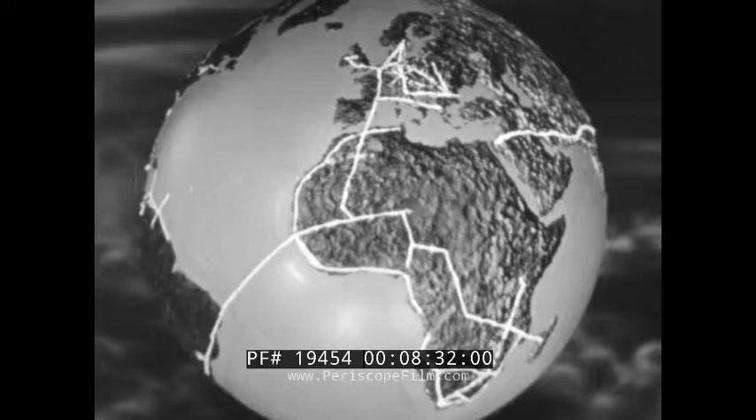Worldwide coverage, but it has not been accomplished in a day. It is the result of a smooth-running combination of men and machines. In that combination lies the story of Lockheed itself. It is a success story, modern, exciting, typically American. The Lockheed Aircraft Corporation plant, Burbank, California, in 1926. And today, the same company, the same location, but quite definitely not the same plant.

As recently as 1932, sales aggregated the overwhelming total of $23,298.03. In 1940, actual deliveries amounted to more than $42 million, and conservative estimates indicate that in 1941, this figure will be more than doubled. And to the men of Lockheed belongs a large share of the credit, to their skill and to their loyalty. They are a cross-section of typical American workmen: drillers, riveters, tool makers, die casters, machinists, and technicians.

In 1931, there were only 300 of them. 1941, over 35,000. Every man who checks in, from office boy on up, has taken and passed exhaustive tests covering intelligence, temperament, and special aptitude to prove his individual ability. 35,000 American workmen, the right men for the right jobs to build the best planes.

This is not a trick shot made with mirrors. It is the drafting room of the engineering department, where every new Lockheed has its beginning. A beginning conceived with the purpose of supplying the answer to definite needs of the aviation industry. To attain this goal, over 850 engineers make over 5,000 drawing plans, devoting a total of over 200,000 work hours to their mission of creating one new design.

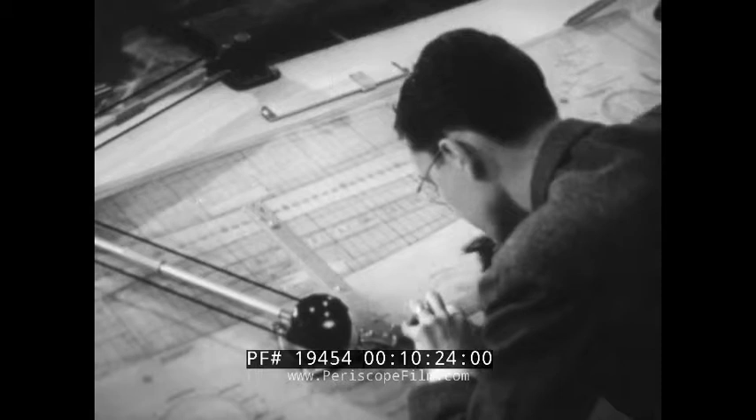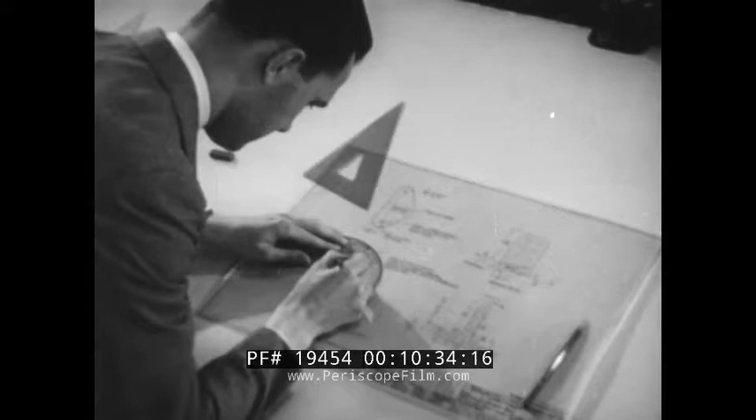The component parts of a modern airplane's wing, fuselage, and tail surface are almost countless in number, yet every single one of them must be engineered. Even the most minute part receives the greatest attention. 4 separate drawings are made showing detail from 4 different angles. Although the part is no larger than a silver dollar, it will have to go a great deal further.

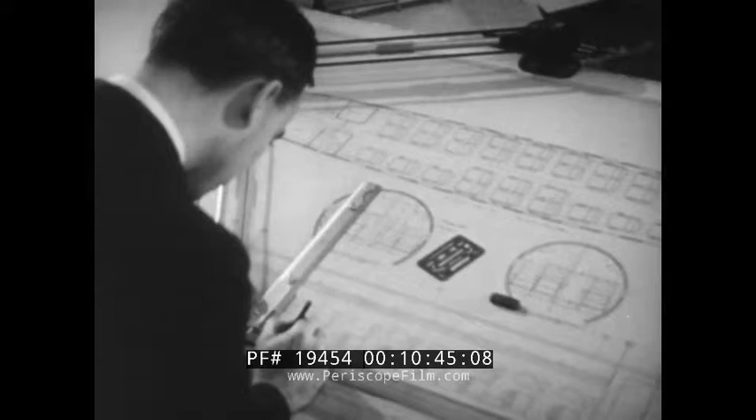The interior of a plane is one feature of design seldom associated in one's mind as coming under the supervision of the engineer. Yet one of his most important jobs is to provide utter comfort for passengers traveling through the air at high speeds. The Lodestar's cabin has been designed for this comfort. Inside, the sound of powerful motors is reduced to a pleasant hum by scientific soundproofing and vibration control.

Restful chairs, ample space, and headroom are results of thoughtful planning, and all Lockheeds are especially adaptable to the requirements of private owners. For businessmen to whom time means money, the Lodestar is convertible into a convenient and dependable office in the sky. The compact 12 becomes a comfortable lounge for attending important events anywhere at any time.

The cabin of Lockheed's new four-motor transport, the Excalibur, will look very much like this. Although the plane is still under construction, the engineers have built an exact replica, known as a mock-up, out of wood. In this way, every possible detail of passenger comfort can be effectively predetermined and applied.

But the ideas and plans that this man and the hundreds like him put into execution are not only those of Lockheed's chief engineers, but those of the entire flying world. For the Market Research Division maintains close contact with the operative branch of the industry. The staff compiles lists of important features relating to a plane's design. These findings are set up in the form of questionnaires. If you were to build your own ship, on the flight station, where would you locate emergency controls? On the engine control stand, where would you put the levers and the rudder pedals?

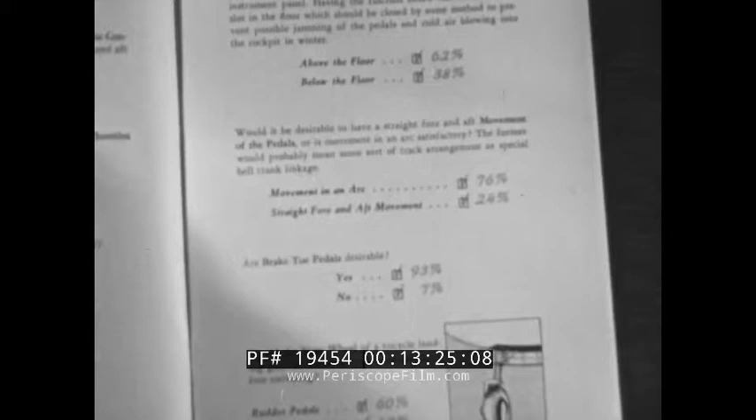Detailed graphs and charts are compiled by competent statisticians. No suggestion is too small. Every answer to every question is checked and noted. These findings are recorded in another pamphlet. You told us this is the way you would do it. On flight station, on engine control stand. And on rudder pedals, we asked, are brake toe pedals desirable? 93% said yes, 7% no. That verdict is submitted by men whose combined opinions represent the experience of over 16 million hours of flying.

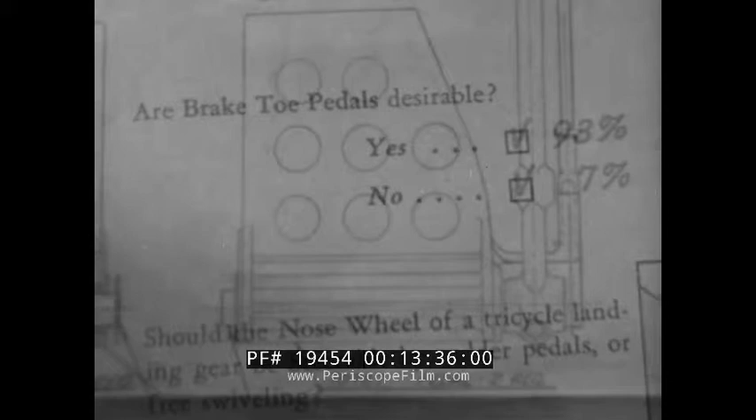These practical viewpoints, as gathered by market research, are submitted to the engineers. They combine these ideas together with their own creative ability in the conception and building of every new Lockheed plane. That's how Lockheed designs airplanes to suit the men who know airplanes best: operators, pilots, and regular airline passengers.

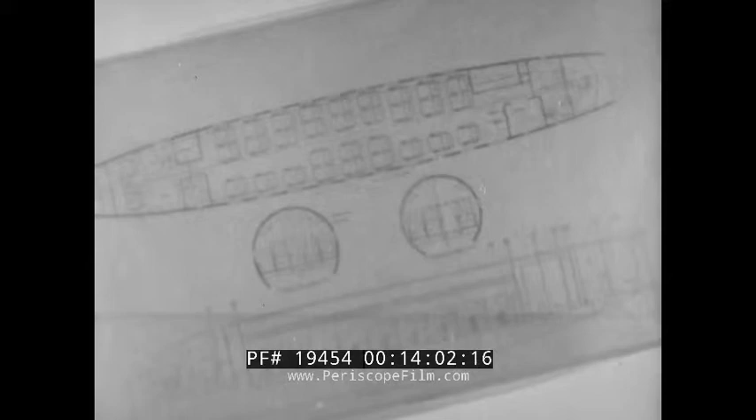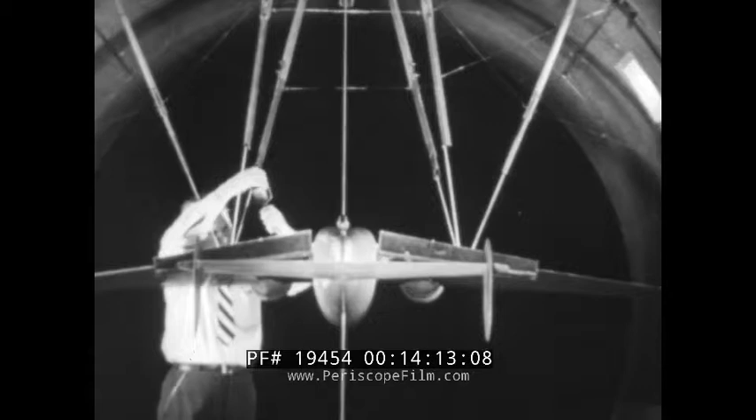And the first form a new plane takes is on paper. From these drawings and thousands like them, an exact scale model known as a wind tunnel model is made and is connected to instruments which determine its flight characteristics. The model is hand-carved, accurate to the fraction of an inch, weighs over 500 pounds, and costs more than $5,000 to build.

The door is closed, the wind tunnel sealed. A flip of the switch and the wind propeller whips up to speed. The model is exposed to a far higher velocity than this 90-mile-an-hour wind. The small wind tunnel model is actually subjected to and withstands a much greater force.

From an idea to an actuality, from theory to fact, from a model to a completed Lockheed, the plane has been built. More than that, into it has been built the strength, ruggedness, and durability necessary for its safety and high-speed performance. But not so long ago, this shining plane was only a small part of a trainload of metal addressed to Lockheed.

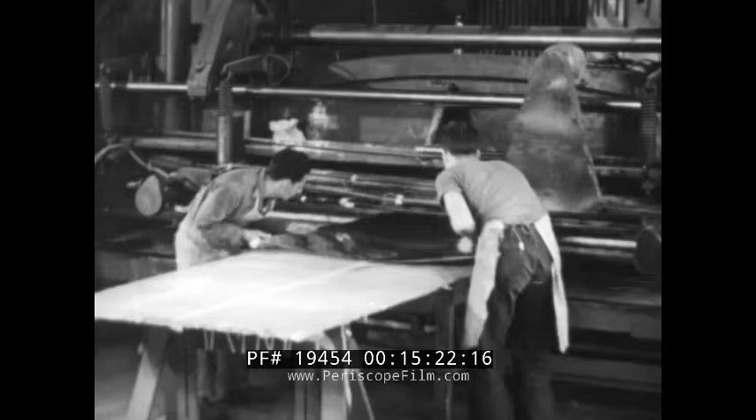For the metal inside these wooden frames is the stuff that planes are made of. Hard and strong, it must be fabricated by men and machines into the parts that make airliners. Giant shears act as huge mechanical scissors. Metal sheets are slipped into place. The sharp blade strikes and cuts through them as if they were cloth.

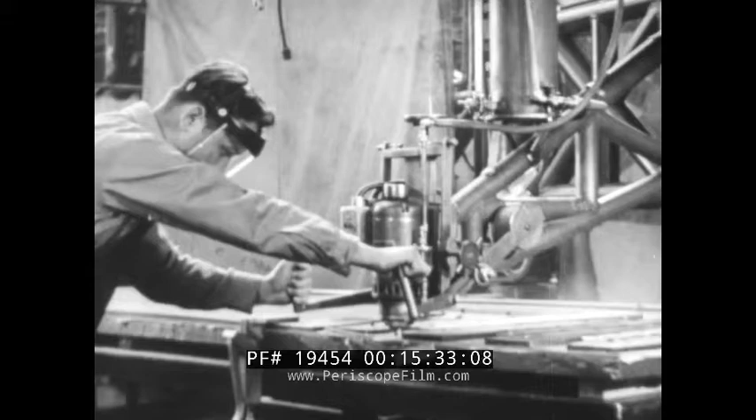The high-frequency router, a dental patient's nightmare, turns 15,000 revolutions a minute and cuts layers of metal into their first rough shape. The bit turns so fast that it must be cooled by a constant stream of oil.

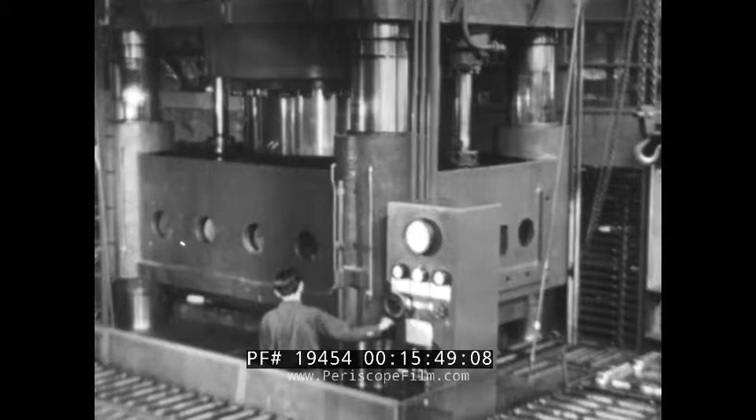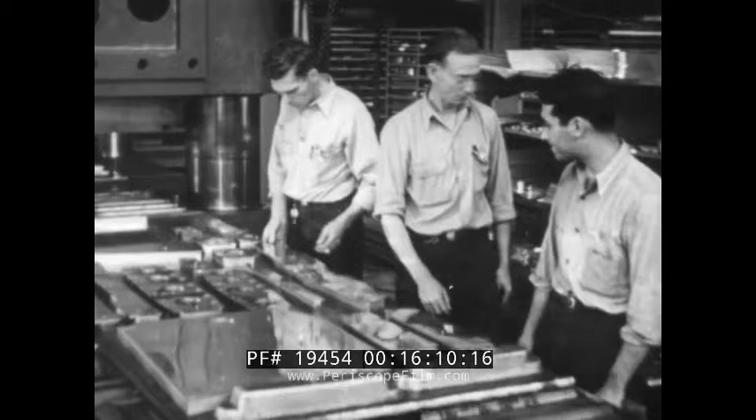The massive hydro press exerts an overall pressure of 9 million pounds, and it literally squeezes parts out of metal. An endless chain of roller conveyors carries a tray with the forms to workmen. They put the metal which has already been cut to the correct size in place on the forms. The tray now continues on its way into position under the press. The operator touches a switch, the press starts down, and look out below.

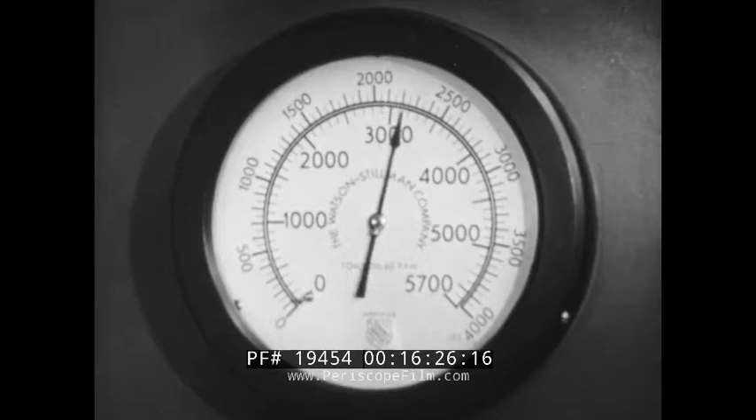Almost unbelievable pressure, an irresistible force, but under perfect control. And where plain sheet metal went in, finished parts come out. The hydro press turns out more parts in 1 minute than 2 men could complete in a whole day, and turns them out better and more accurately.

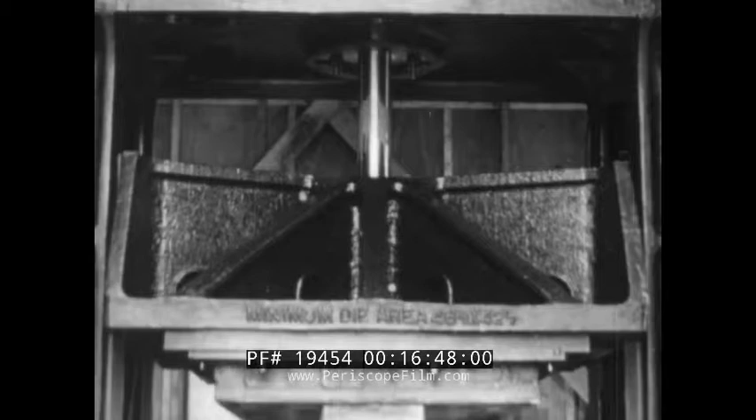A compressed air stamp which forges metal is an excellent example of powerful machinery under absolute control. Taps as gentle as a tack hammer, then the crushing impact. What a nutcracker this outfit would make. And yet its control is so delicate that it can crack an egg, at least so the operator claims.

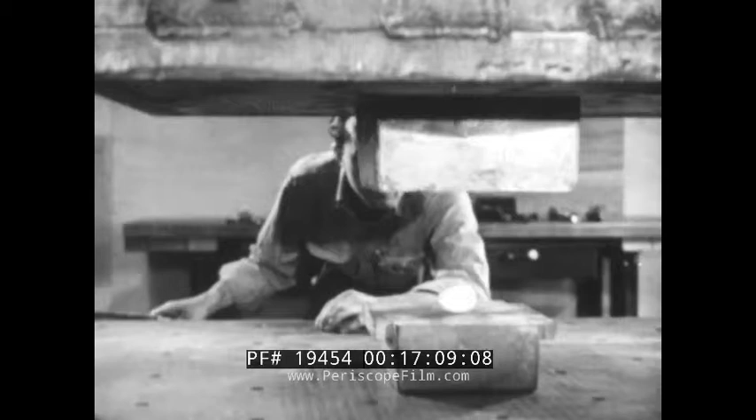Skilled men and precision machines have fabricated these parts, but even metal can be strengthened and protected. To do this, there are several types of processing. Complete electrochemical anodizing baths provide parts with a protective coating of oxide film. This is a safeguard against the threat of corrosion caused by moisture. It is an interesting fact that these parts are protected against any harmful effects of moisture by being given a bath.

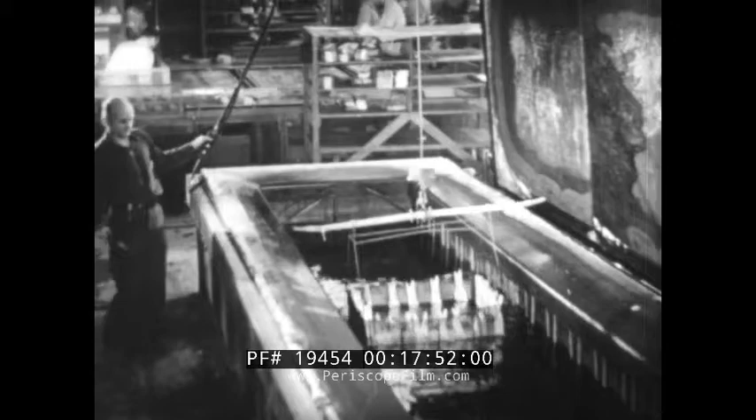Another type of bath is used for a different purpose. In order to harden and thereby strengthen certain parts, they are immersed in a hot salt solution of sodium potassium nitrate. In large ovens, other parts are hardened by baking at 1550 degrees Fahrenheit and quenching them in oil.

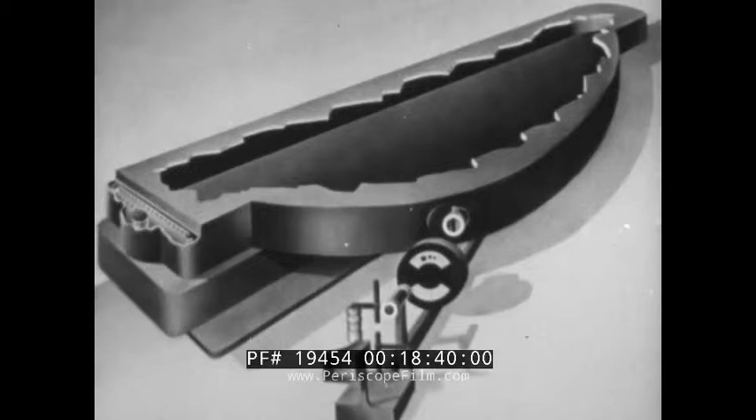It is easy enough to say that these parts, which will eventually be the plane, are strong. To prove that they are, to constantly guard the Lockheed measure of strength is the duty of the testing laboratory. A spectrograph is one of the most modern scientific testing devices. It analyzes the purity of the metal alloys which go into a plane. Tremendous heat created by an arc burns sample filings of the metal. These filings are placed in a cavity on the lower of 2 acid-treated graphite electrodes and then burned.

The light of the burning metal passes through a lens and then through a rotating sector, the adjustable opening of which controls the amount of light falling on the slit. The light now passes through the slit and falls upon a diffraction grating. This diffraction grating is a concave aluminized glass plate on which 24,000 lines per inch have been ruled with a diamond point. The light is separated by the grating into wavelengths.

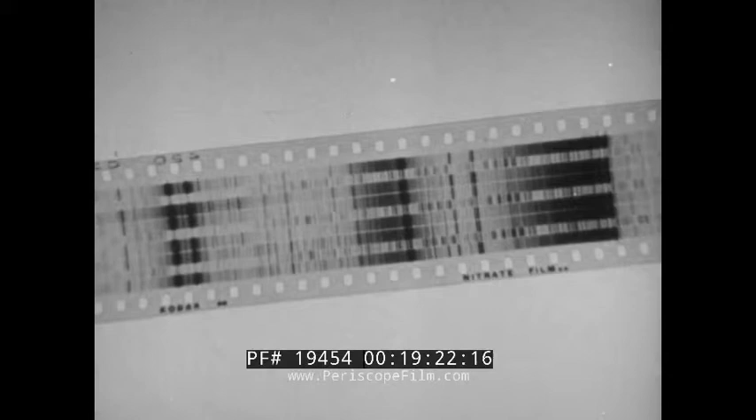These wavelengths, or light rays, fall upon a strip of film, and a photographic record of them is thus produced. Since each element has its own wavelength, from the developed film it is possible to determine exactly which are present in the alloy. In this manner, the spectrograph immediately detects all impurities, and any inferior metal is promptly discarded.

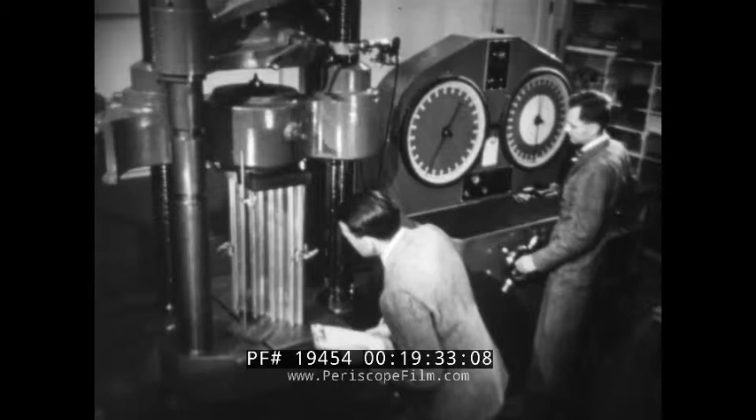The sole purpose of this huge machine is to break things. Its powerful jaws, capable of a compression of 300,000 pounds, are about to crush a small section of the wing in order to measure its resistance. Now watch carefully. The upper jaw is clamping down with an invisible, relentless force on the seemingly frail strip of metal. But actually, just how frail is it?

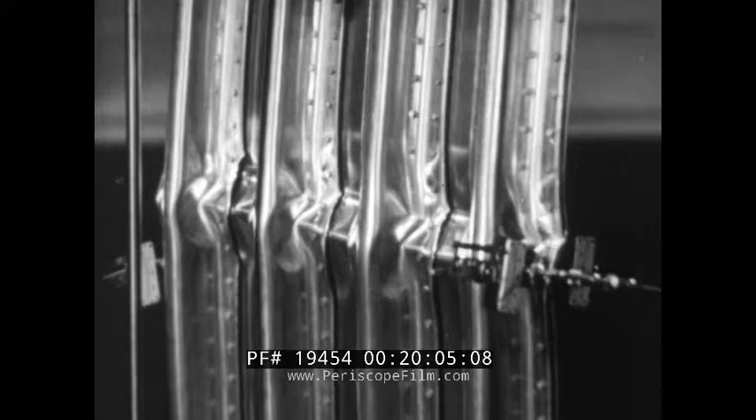60,000 pounds? 70,000? There it is, a slight ripple. The breaking point has been reached, and it takes a pressure of over 80,000 pounds to even bend this frail little section of a wing. For contrast, let's see what happens to a solid cylinder of concrete, which certainly appears much stronger. There is the first crack, and the concrete shatters completely under a pressure of less than 75,000 pounds.

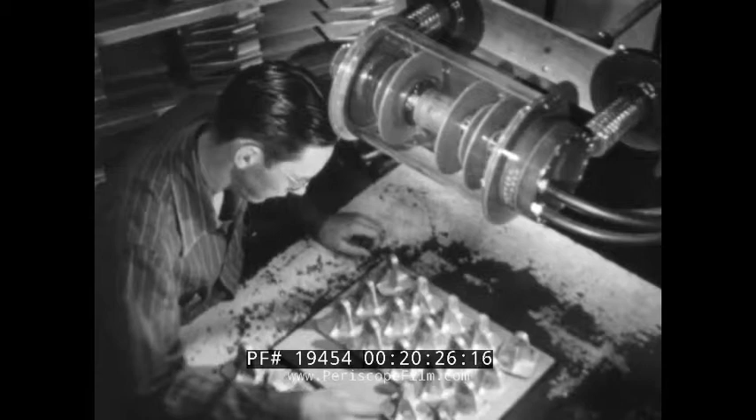All stressed parts, such as forgings and castings, are X-rayed for any possible flaws in the metal. Lockheed X-rays more parts than all other aircraft manufacturers combined. They may look new and shiny on the surface, but that doesn't matter. What are they like underneath? This batch is fine, perfect.

A different story here. Those slight, almost imperceptible flaws which doom it to the scrap heap would be invisible to any eye other than the X-ray. Therefore, although it is important to know what is on the outside of a plane, every stressed part is X-rayed because Lockheed thinks it is even more important to be absolutely positive of what is on the inside. Yes, every part of this plane is built for the strength, ruggedness, and durability to achieve the highest speeds.

And there goes the Lodestar. Carrying a full load of 17,500 pounds, it speeds down the runway for the takeoff. In 15 seconds, after a run of only 860 feet, it leaves the ground and soars into the air, climbing at a rate of 1,200 feet per minute.

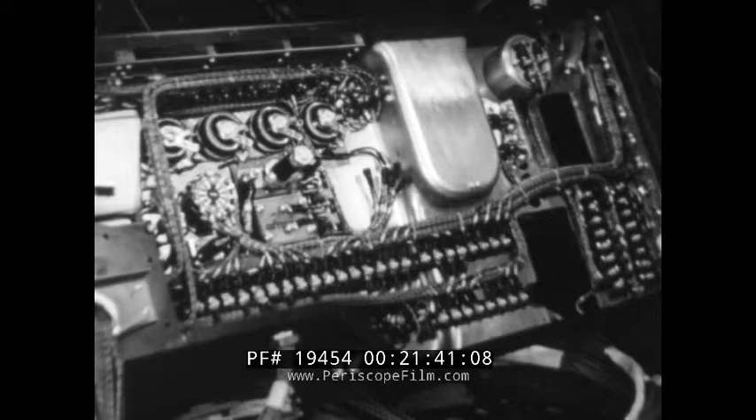And while the plane is in flight, the dials and indicators on the panel are the guides by which a pilot flies. Over a half a mile of wire connects them with the controlling instruments, which must be infinitely accurate before they are installed. In the instrument testing laboratory, each instrument and accessory is, to all intents and purposes, actually flown before being installed on the plane itself.

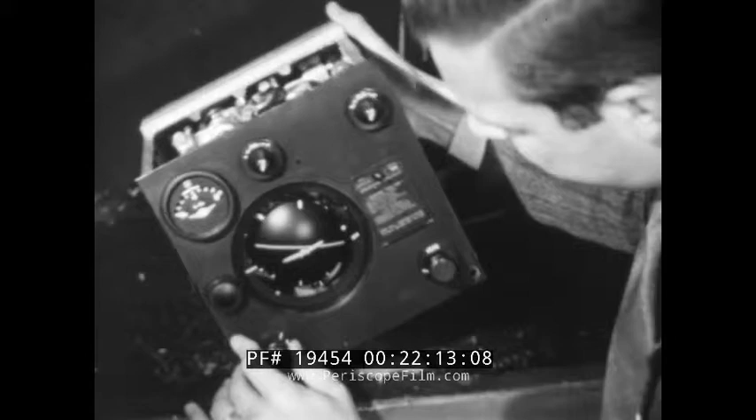For instance, on this stand, a motor duplicates the swing of a plane to test the turn and bank indicators. Here, tachometers are also tested, and propeller governors, vacuum pumps, fuel pumps, starters, generators, and hydromatic motors for feathering propellers. The automatic pilot is checked by a vacuum system against mercury manometers. This small box can guide a plane in flight, keep it as true to its course as the most experienced pilot.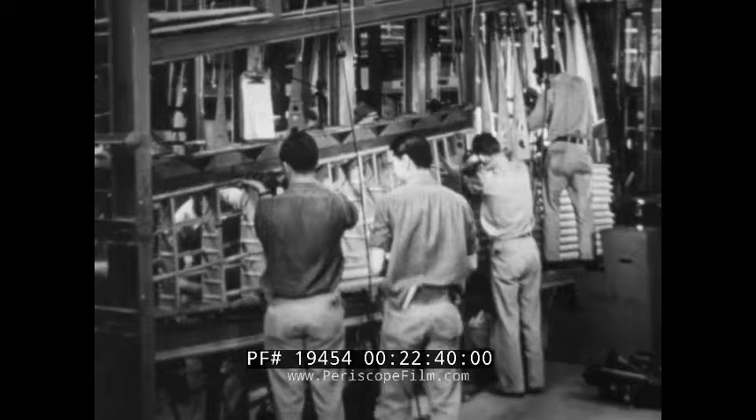An airplane is a chain of which the thousands of separate parts are the links. They must be forged together in order to shape the wing, the tail, and the fuselage. The duty of the wing is to provide the lift that sustains the flight of an airplane. Here in the plant, it must be assembled as flawlessly as it was designed.

Although a wing is generally considered as a unit, it is really composed of 3 parts, 2 outer sections and the center section. We are all familiar with the general shape of a wing, but while an outer section is in the first stages of assembly, we can get a good idea of the complex structure on the inside. Every rib and crosspiece has its purpose. Remember, it was just a small part of the wing that we saw withstand a compression of 80,000 pounds.

Each operation is executed with precision and care as the outer section moves down the production line and takes shape. High-speed electric drills punch holes for the rivets. There are more than 700 drillers or riveters who have all had previous training. Even so, before they're assigned to actual production, they must attend Lockheed's own school until they can uphold the plant's standard of efficiency and skill.

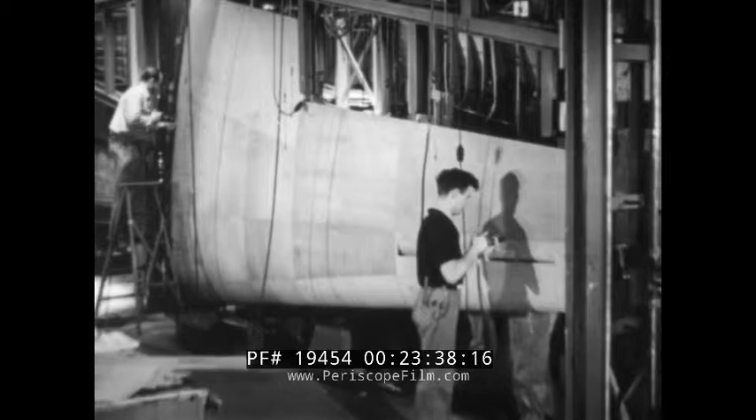There are more than 50,000 rivets on a completed wing, and every one of them is checked, examined, and checked again. This requires an army of over 200 inspectors, such as this one. But by the time a Lockheed plane is assembled, every square inch of it has been inspected at least 5 times. Inspector number 158 finds this row perfect and okays it.

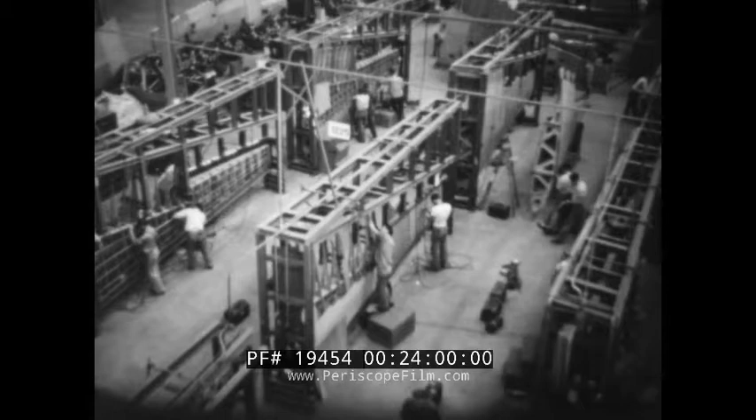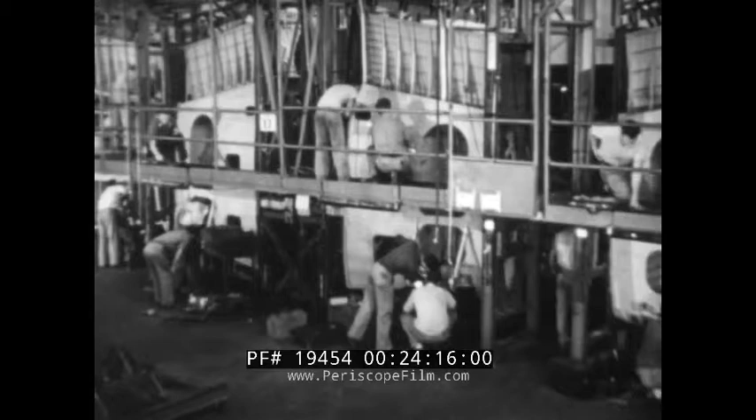And the story of one outer wing section is the story of 10, of 20, of 1,000 sections as they move down the line in an endless parade. Mass production with the emphasis on precision and quality. The assembly line for the center section of the wing is one of the largest and most vital units in the plant. It has to be because the center section is the strong man of the plane.

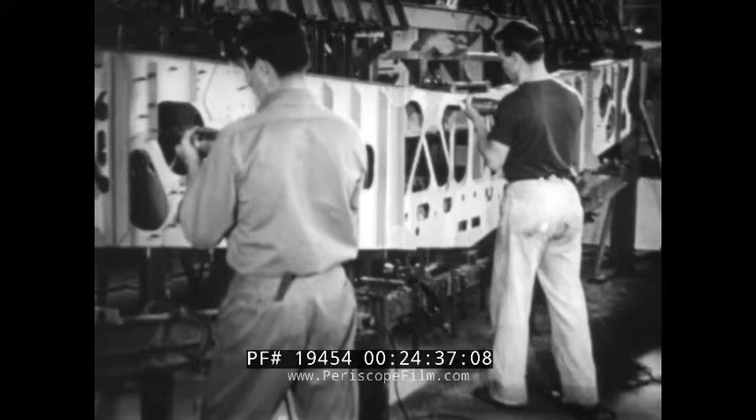It must be constructed and assembled so as to be able to support heavy loads and to withstand great strain, for it unites the 2 outer wings with the fuselage. The fuselage will eventually rest in the gap between the 2 shoulders, and the wings will be joined like arms on either side. The main beam of the center section is the strongest part, the backbone of the entire plane. Like a bridge, it must carry any burden with steadfast dependability.

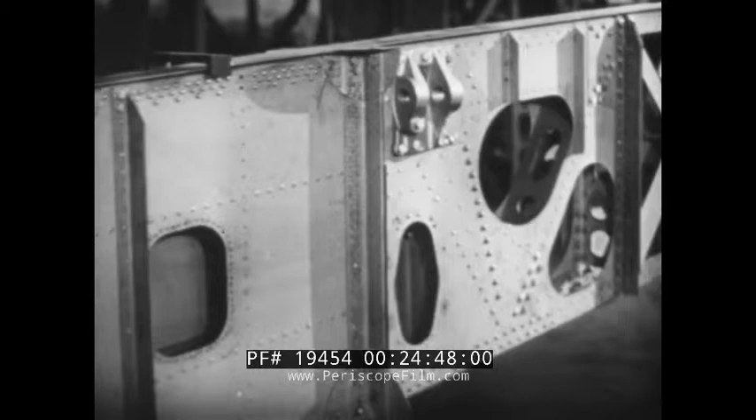And the main beam is built just like a bridge. At all times, it carries all of the flying load, the engine load, and the landing load. And it is stressed to support more than 5 times the total weight of a fully loaded plane. Completed and assembled, capable of supporting a static load of 70,000 pounds, the wing will do its job as the men who built it have done theirs.

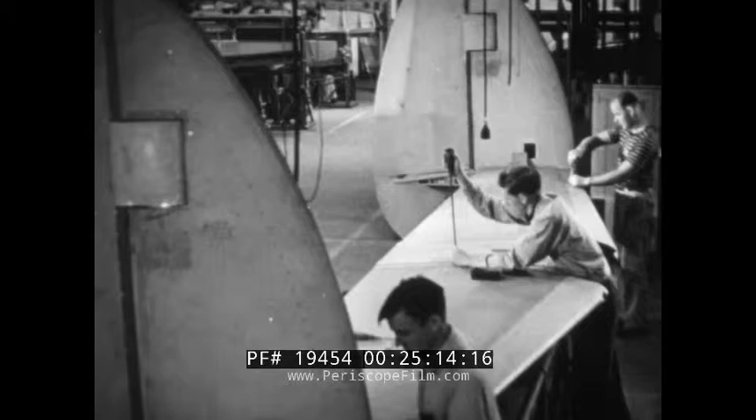The tail surfaces control the maneuverability of a plane. The use of twin rudders was developed by Lockheed and are one of the distinguishing features which point out every Lockheed. The fuselage is the body of the plane.

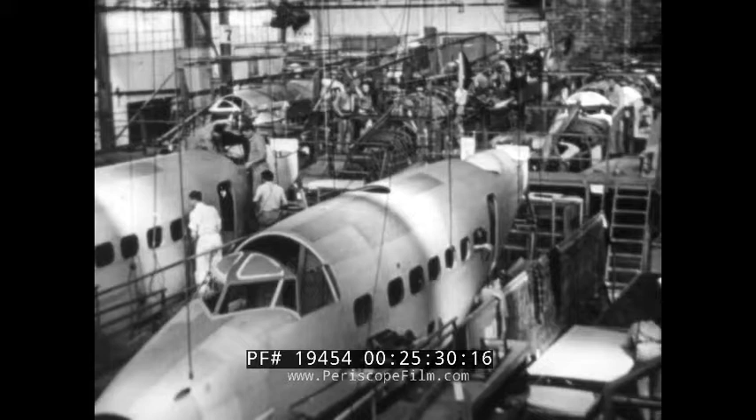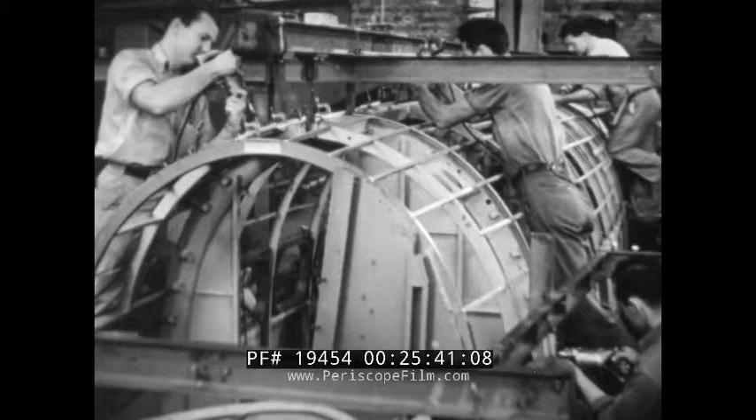It represents the final word in aerodynamic design and streamlining. And during construction, these basic principles are built into the fuselage and applied to every operation from the beginning to the completed shell. As the first step in its assembly, the bulkheads are joined together by stringers, which form the basic shape and strength of the fuselage. Skin fitters then fit and shape the metal sheets, attaching them with removable fasteners.

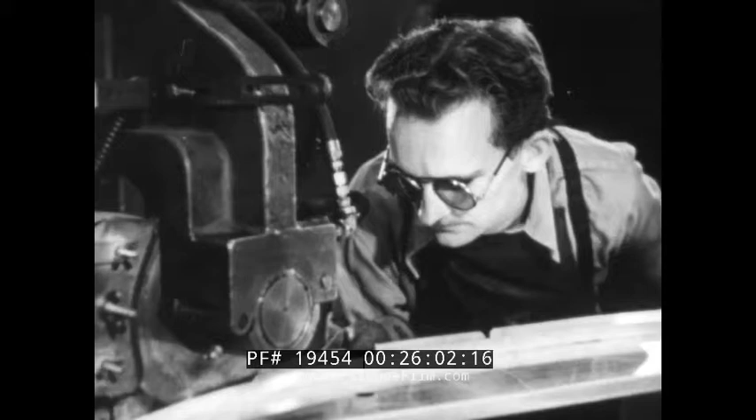On their heels come the riveters, while every stage of the assembly is constantly under the close check of inspectors. Assembling with electric continuous spot welders facilitates production and gives many fuselage parts an extra smoothness for better streamlining. With an eye to the future, Lockheed is constantly enlarging on this process because better streamlining means greater speed. And so another fuselage is finished and ready for mating with the wing.

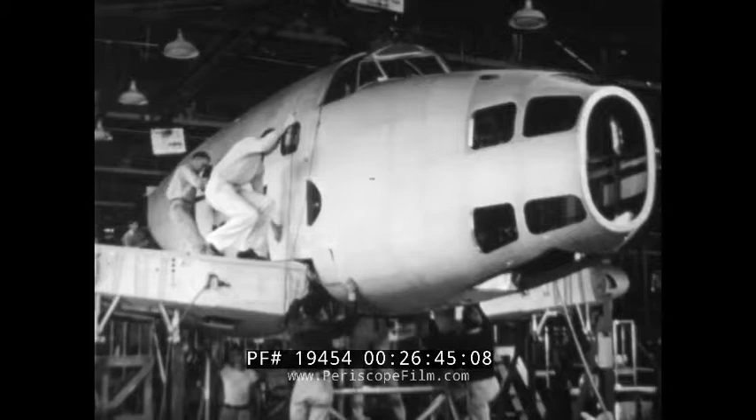Like a ship being launched, it moves slowly down the ways. Slowly now, yes, but for just a little while longer. Soon sunlight will be glinting from its metal sides. Its nose will point upwind. In the comfort of its cabin, passengers will read or write or sleep or think after their own fashion, and beneath it, the lakes, rivers, and valleys of the countryside will unfold. Slowly still, the fuselage is lowered into place, united with the wing, and now, slow no longer.

Speed on the water. Speed on the snow. Speed on wheels. On rails. Speed on wings. There is truth in the slogan that it takes a Lockheed to beat a Lockheed.

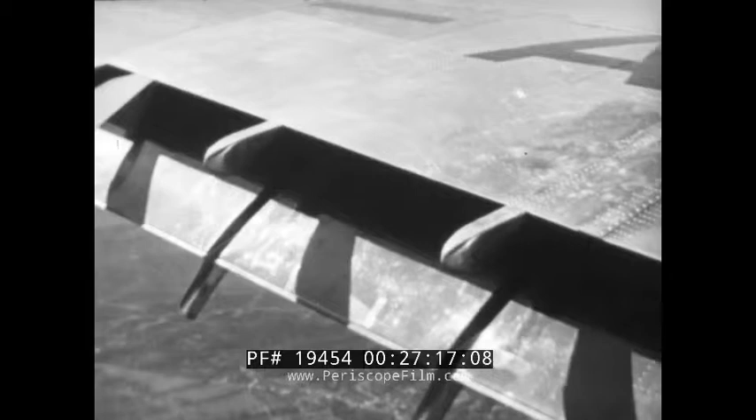And as the plane approaches the field, it slows down for the landing. The Fowler flap has been adopted and developed by Lockheed. The flap gives a greater lift to the wing and provides a brake action to reduce the speed. The plane lands at 65 miles an hour, and from a height of 50 feet, it can come to a complete stop in less than 600 yards.

This Lockheed Lodestar, with its safety, its comfort, and its great speed, typifies the ideals of aviation in America. To protect these ideals, Lockheed is contributing its share toward national defense and the defense of democracy in other parts of the world. These B-14 bombers, better known as the Lockheed Hudson bombers, are rolling off the production line at an ever-increasing rate. They have been ordered in great quantities by Great Britain and Australia.

When ready for delivery by boat, the Hudson bombers are dismantled. The sleek fuselages are carefully encased in canvas, and the wings, already stowed away below deck, are crated in wooden frames for safe shipment. When the planes reach their destination, they are easily reassembled and soon ready to take their places in the staunch defense of the British Empire.

And while these planes start on their long journey by water, others are being given their final test flights for the tough job ahead. And still more are winging their way directly toward Canada. In combat, in actual line of duty, the Hudson bombers have won a name for their efficiency and dependability. And as America builds its planes for commerce and for defense, it is well to remember that Americans invented the airplane and developed the modern conception of mass production used by Lockheed.

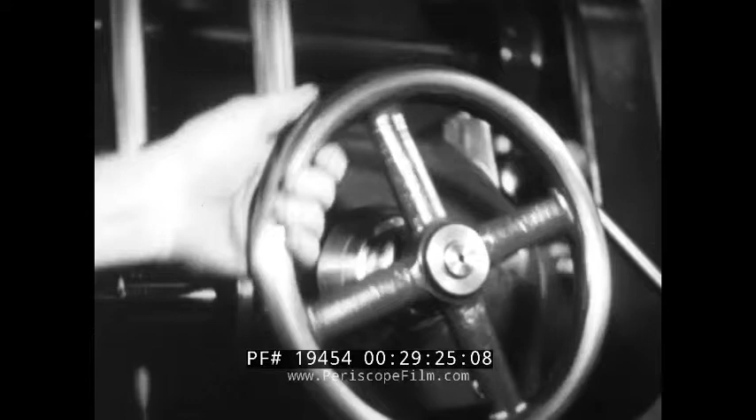And out of the vast production line come Lockheeds: the 212, the Electra, the 12, the Hudson Bomber, the Lodestar, and now Lockheed's answer to the challenge of our times, the interceptor pursuit P-38. It has been developed solely for national defense, and Army officials consider it the fastest military plane in the world today. The P-38, a man-made comet.

The P-38 is a completely new development in conception and design. The purpose of this deadly single-seater fighter is to prevent any would-be attacker from reaching his objective. Lockheed is building vast quantities for the United States Army, and many of its features are closely guarded military secrets. But it can be revealed that the P-38 will climb a mile in a minute, and its motors are so quiet that it can approach any target almost without warning.

And as wings soar higher above America, so are soaring the hopes of free men the world over. For they know that whether it be for commerce or defense, ship for ship, American planes have no equal. And just as Lockheed commercial transports serve the people, so do the Lockheed military planes stand ready to serve should the need arise. The striking power of Hudson bombers, the speed of the P-38, envisioned by Lockheed, engineered by Lockheed, built by Lockheed.